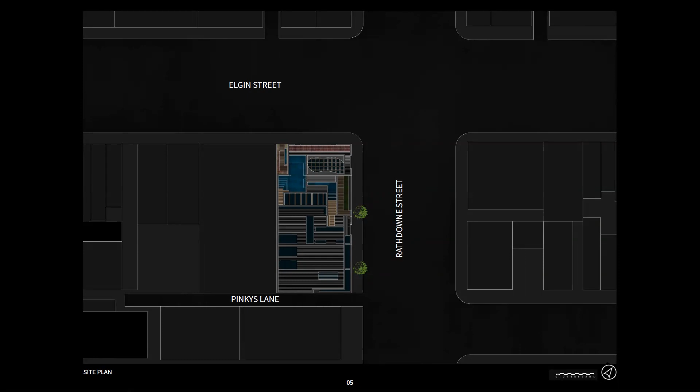The Spirited Away idea can be defined as the mysterious disappearance of a person. When you look at this building, I have called it the mysterious disappearance of a building, where I want the visitor to ask themselves, what is it? And try to lure them into this bathhouse.

The brick wall is designed to look abandoned, with a mirror behind the brick to reflect the blue sky, creating a mysterious building.

The view is looking at Elgin Street. You can see the access to the laneway and into the main entrance, having green walls and benches allowing visitors to enjoy the space before entering the bathhouse. There is also a waterfall in the laneway to attempt to hide the loud traffic.

From Elgin Street, you will walk into the laneway surrounded by wall gardens, giving you the entrance experience, into the reception. This will then take you down the staircase into the basement.

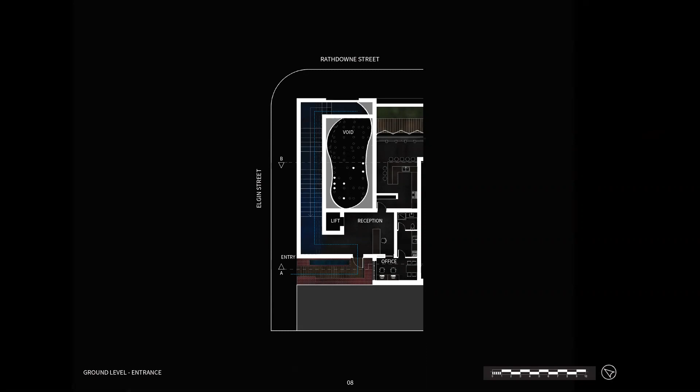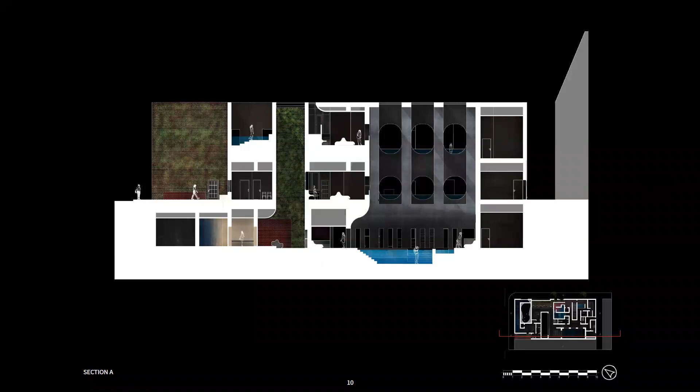My concept is transition, the process to give visitors a better experience. There are four large spaces in the bathhouse that provide the transition of different spaces: the laneway, the forest foyer, internal facade, and indoor pool, which I will discuss further in the next slides.

As you walk down from the dark staircase, you will see the forest foyer, where you can wait for your friends or enjoy the space. Then you can go into the change room and come out to the internal facade, where lockers and toilets are located. Then you can walk into the indoor pool and access the other bathing spaces on ground level via stairs and lift.

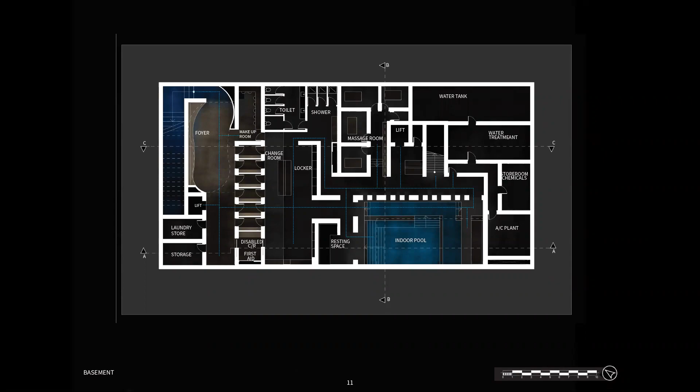As you come down from the dark staircase, you will see the foyer and the change room. This space is a mix of a forest and an outback feeling, where the timber posts represent tree trunks and the leaves hang around them. The idea of this space was to get away from the city, creating the first space where you can feel relaxed before entering the bath space.

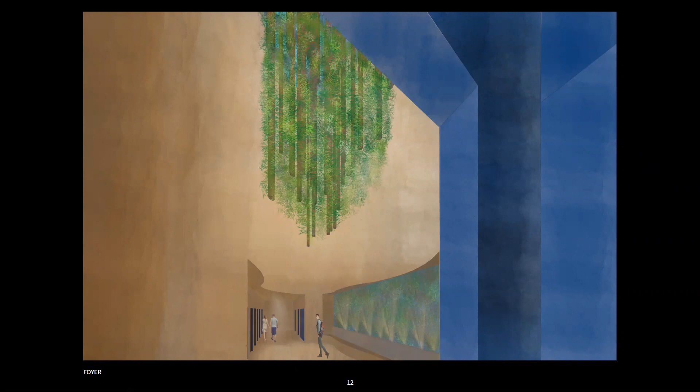After coming out of the change room, they will walk out to see another building where they will feel they're outside and haven't entered the bathhouse yet. I wanted to create an internal facade that will give the visitor the feeling that they are about to enter the bathhouse, where the exterior facade doesn't show that. This shows by the transition from the brick to a concrete material.

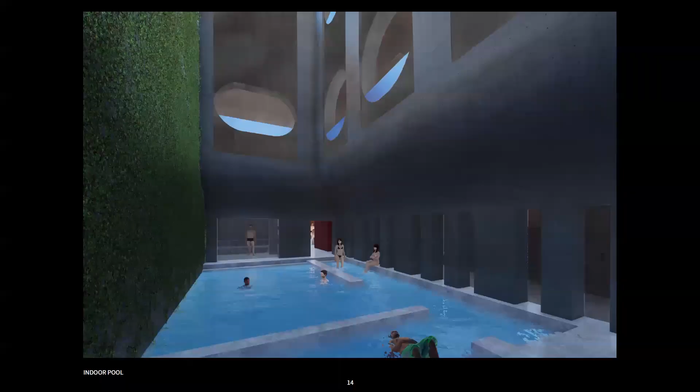As you go through the hallway from the foyer, you will see the indoor pool, a 16 meter high void, creating an atmosphere that you are in the bathhouse. The indoor pool has different levels. Visitors can walk in the pool or they can walk in the dark hallway that is behind the columns. This will lead to the lift and stairs to the ground level.

As the visitors walk up to the stairs, they have the option to go to various bathing spaces. The lightings in the bathhouse are different throughout the building. The corridor facing the main street will have natural lighting. As they walk down into the resting space and to the cafe, it will become a darker space. This is to inform the visitor of the transition of different spaces.

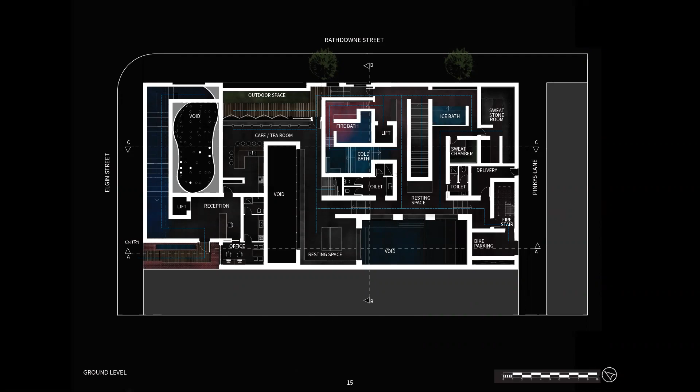Every hallway has an artificial mist coming out from the ground, and there are outlines projecting different colors with the mist. This will create a different experience throughout the bathhouse.

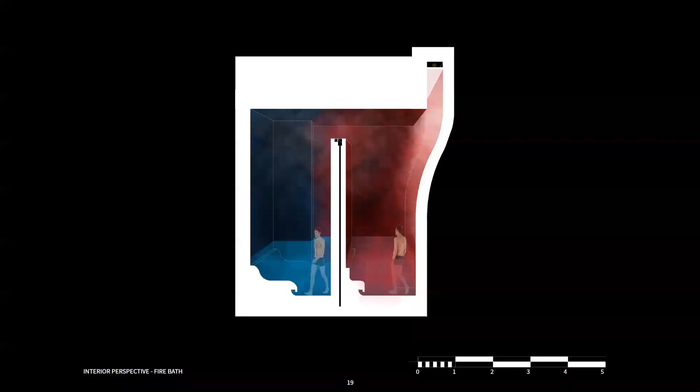The fire bath is designed with two different spaces, where the white lights reflect into the red concrete wall, which then reflects into the dark space, creating two different atmospheres. This is a cut section of the indoor pool, fire and cold bath.

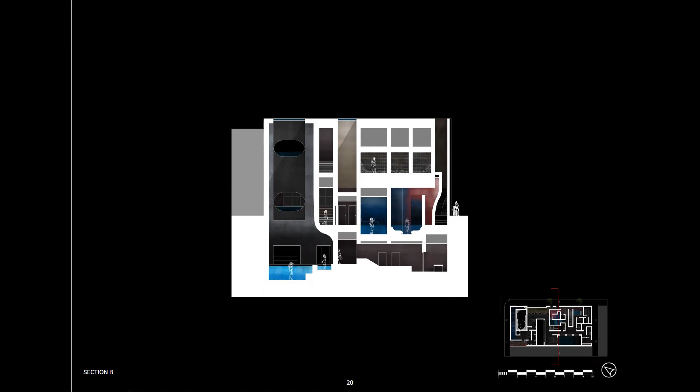As you are taking the stairs to the first level, you will walk to the resting space with a seating area looking over the void. After that, the visitors can walk into the individual bathing spaces.

The sandstone room is where visitors lie down on a red clay floor. They will create an interesting sound. The natural lighting will help visitors to see the artificial mist rising from the ground.

The shower stone is designed to make you feel stuck in a cave. There are layers of rocks on the side and a light source coming down from the void to make you feel like that's the only way out. Artificial mist is placed beside the rock and shower to create a space that makes you feel like you're alone in that cave.

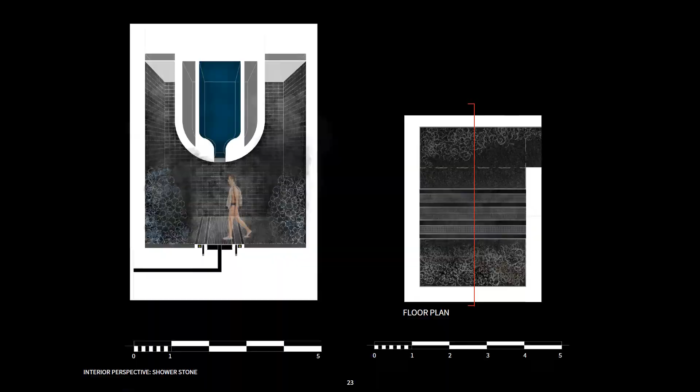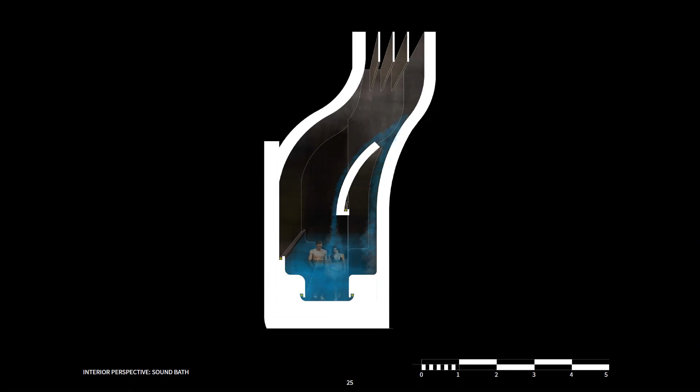At daytime, the only light source is coming from the ceiling, and at night, artificial uplights project to the ceiling, showing the curved walls. This is the artificial lighting from the seating space, coming from the wall and water in the sound bath.

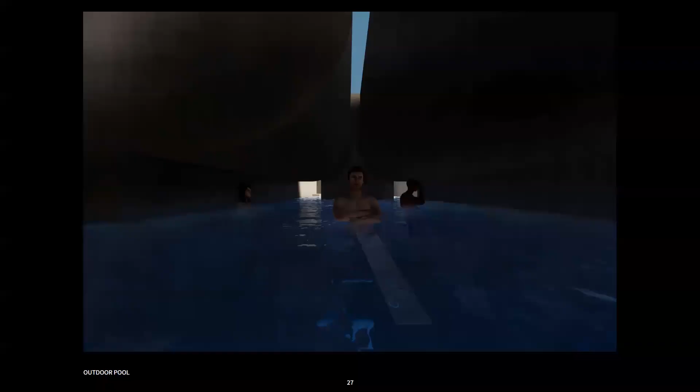The outdoor pool shows the transition from dark to light. In the dark space, the visitor has the choice to be in the dark or the light space in the outdoor pool.

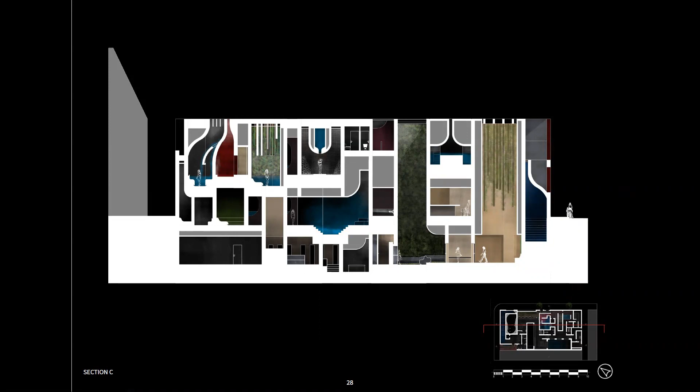This is the section showing all the bathing space in the first level, and also seeing the transition of the change room between the indoor forest and the internal facade.